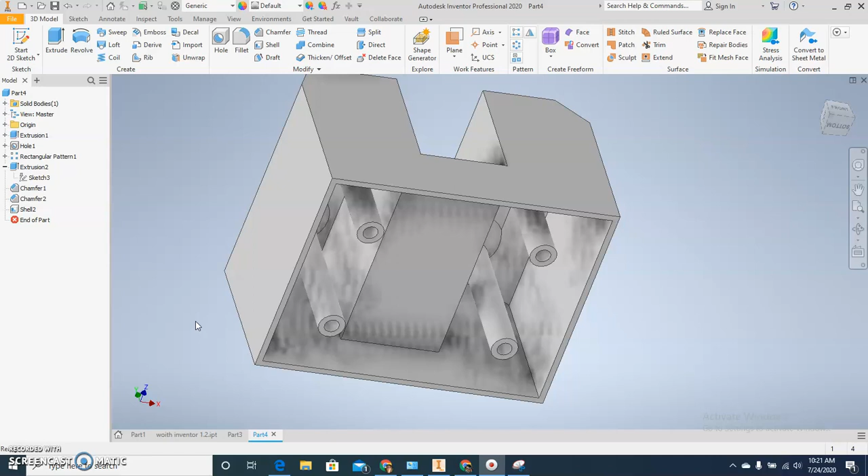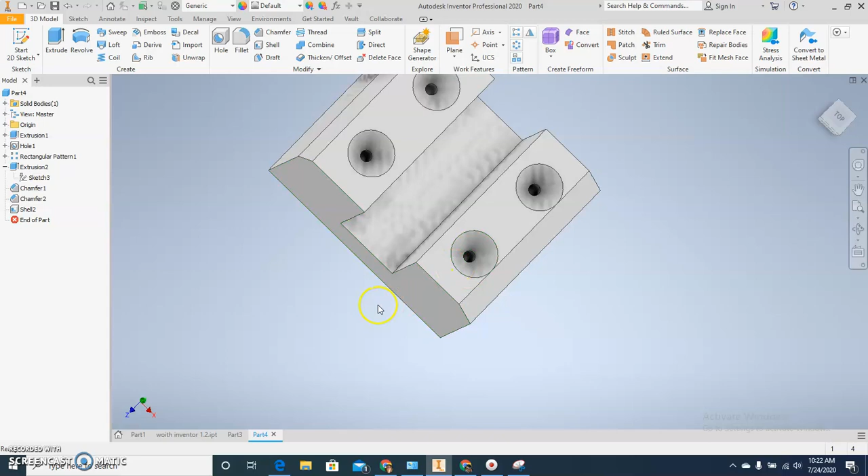I've actually done this video twice now because I had to rush through it. I changed some stuff I was doing, but I think it'll be good for everybody, including me. So we're going to make this: we're going to do a shell, learn a chamfer, learn countersinks, learn how to cut through the object, and get rid of some stuff. We're going to go through this, and I'll show you guys a worksheet. This one might be a little bit longer than the other ones, but it's good medicine anyway.

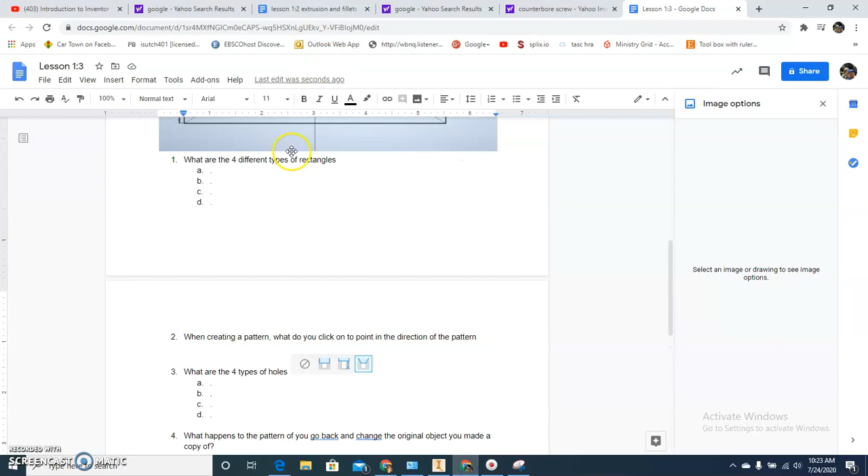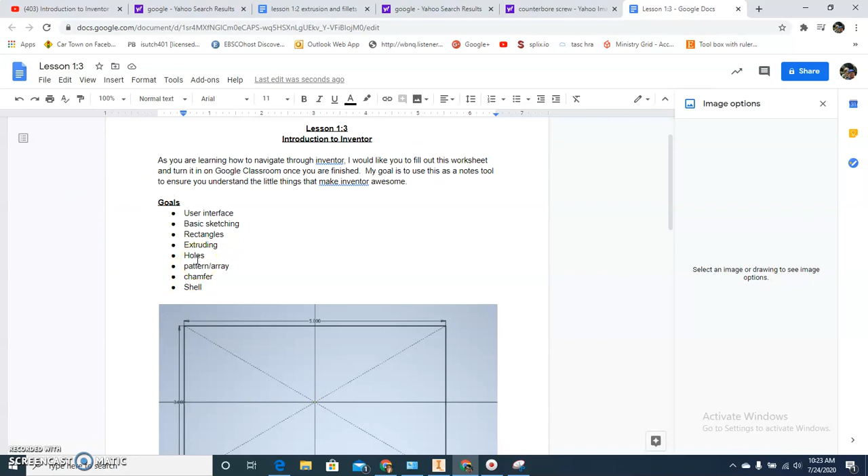Once again, make sure that you are following along on the worksheet, just so we all know that we're on the same page. We're going to go over rectangles, extruding, holes, pattern array, chamfer, shell. This seems like a lot, but when you get down to the brass tacks of it all, this is going to be your basic stuff you do on a daily basis. So get used to it, folks.

Here we go. All right, so I'm going to start off like normal. Now, I want to show you guys a few things before we get started. One, you're making parts. This is not AutoCAD, this is Inventor. You'll forget almost everything you learned on AutoCAD because it's just going to confuse you. You have to do separate files for each thing, as you see with the different things I'm making.

I'm doing the video twice, so I'm going to have 3 of these up here after this because I'm showing you guys how to do stuff. Each individual file will make an individual part because the goal is to assemble these things on one bigger one. This is not a part of something bigger, these are just things we're making.

Next thing, on the interface, if you ever accidentally do this, it's because you've clicked this button up here or somehow you've minimized it. Click this little arrow. Everyone do this real quick just so you know how to do this. It cycles through a whole bunch of stuff. Maybe you do this, maybe you do this, it's no worry. Click this little arrow thing and everything will come back eventually.

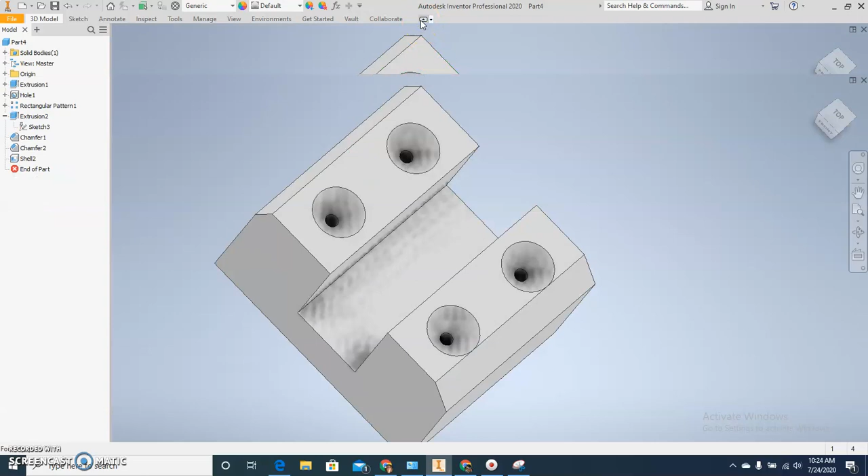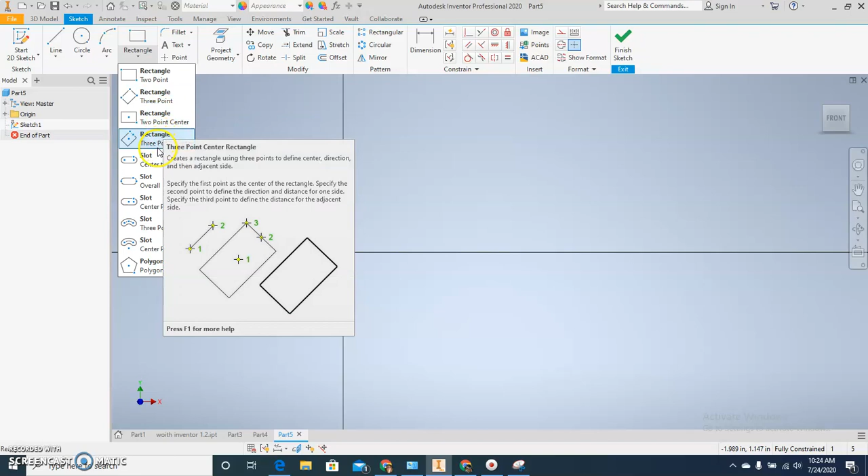All right, here we go. File, new, English standard in.ipt. I'm going to start going through these a little bit faster because you should know how to do this. Start 2D sketch, the XY plane. You're rolling now. Okay, we're going to start with rectangles first. There's 4 different types: 2-point, you've done that, we're going to do it again later. A 3-point, where you click 3 random different points. A 2-point center and a 3-point center. Okay, we're going to do 2-point center on this one.

Click the middle. The function of this is to keep things lined up, because I always want to work off that center point. It helps out everybody. So I'm going to press tab again like I did last time. 3, tab, 5, enter. Now if things get too big while you do it, don't worry, just zoom out or keep typing away and you'll be fine. Okay, press finish sketch.

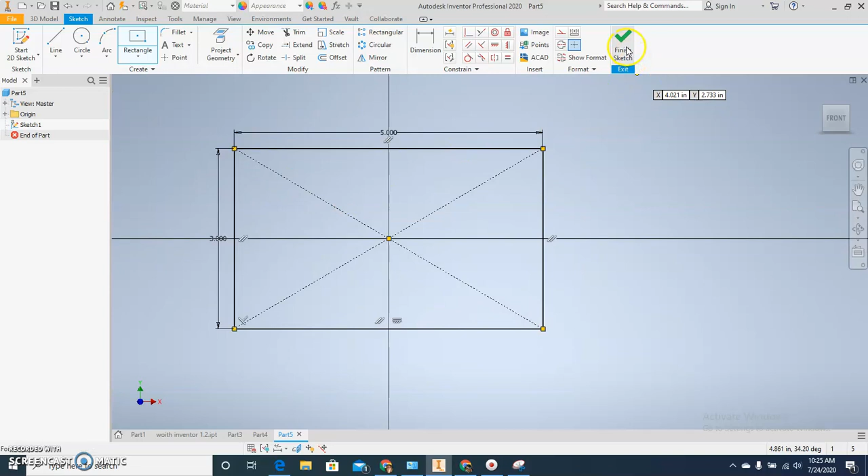Zoom out. Okay, we're going to extrude now. You've done extrusions, awesome, let's just keep it easy. And let's type 4. Okay, easy peasy, you got this.

So next thing is we are going to make a different type of hole. So when you're in hole, so we got to the first one. So there are 4 different types of holes: one is none, which is a straight drill, you all should know how to do that. The other ones are counter bore, spot face, and a counter sink. So here's what those are.

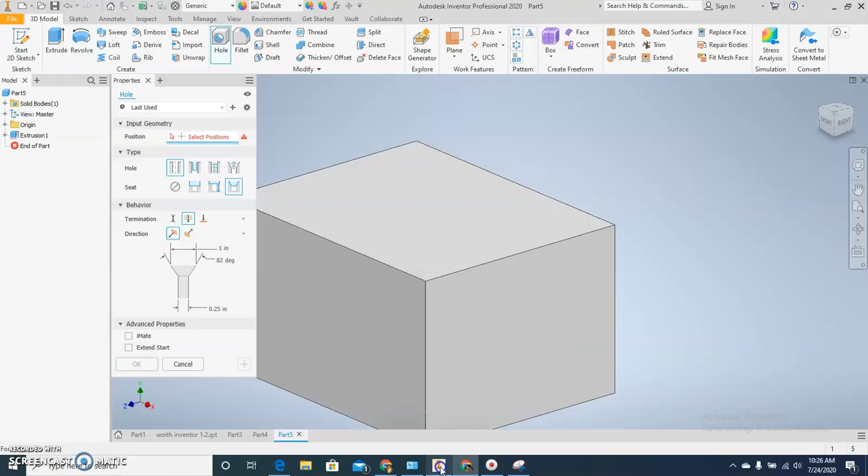So if you're wondering, here's a counter bore screw, used a lot of times in wood and machining, but what it does is it keeps things flat, so it's like a bolt. Okay, the counter sink, which I looked up right before this just so you can see it, is something you would commonly use in wood. It's one that has an angle at the top, just so things sit flush. I just want to show you what those things look like. I rarely do that, but I decided to do it this year. So we're going to do a counter sink. We can do threads too, but I'll wait that for another day.

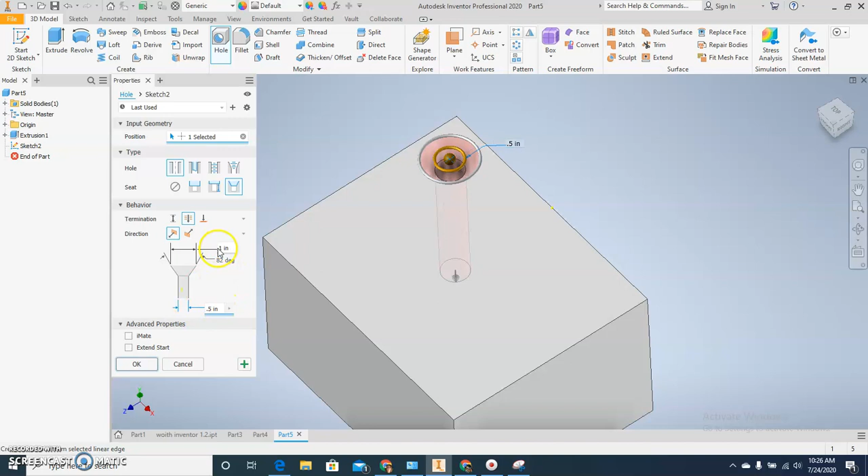All right, so just click up here somewhere. Here's what you know about a countersink: number 1, the top is bigger than the bottom. So if I make this thing right here, let's say this thing is 0.5, and this thing is 0.5, I'm going to get an error. I'm just clicking right now. I'll just press enter real quick and look, it says, dude, I can't do this because these are the same. This is a countersink, not just a basic drill or a none. Okay, so I need to change this.

So I'm going to change this back to 1. Remember, this is diameter going across. All these things, whenever you make a circle or hole in Inventor, it's always based off of a diameter.

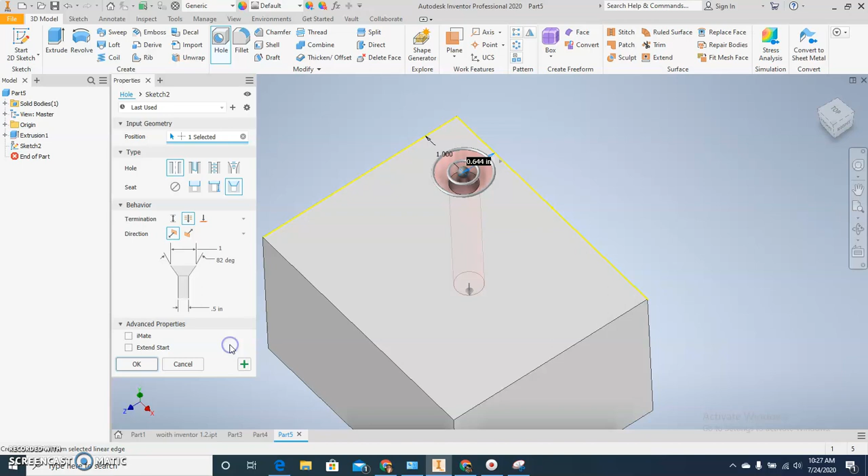So that's made. I'm going to click the edge of this, type 1, press OK. Now I could make multiple different holes here, but then I would have to create the measurements on the edge, and that just takes too much time. So we have a better way of doing it, which is called a pattern, which is next.

There are a few different types of patterns. One is rectangular. We have circle, mirror, sketch-driven. That looks like a fun one. Never really used that one a whole lot. It must be something new or something I've just ignored all my life.

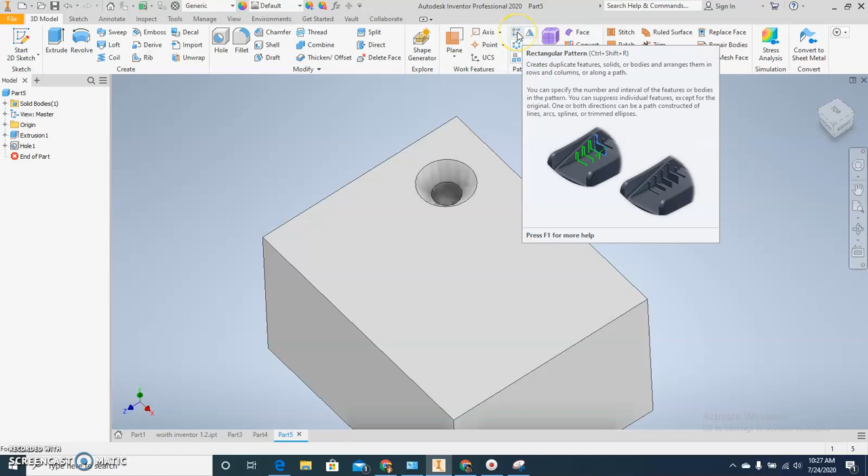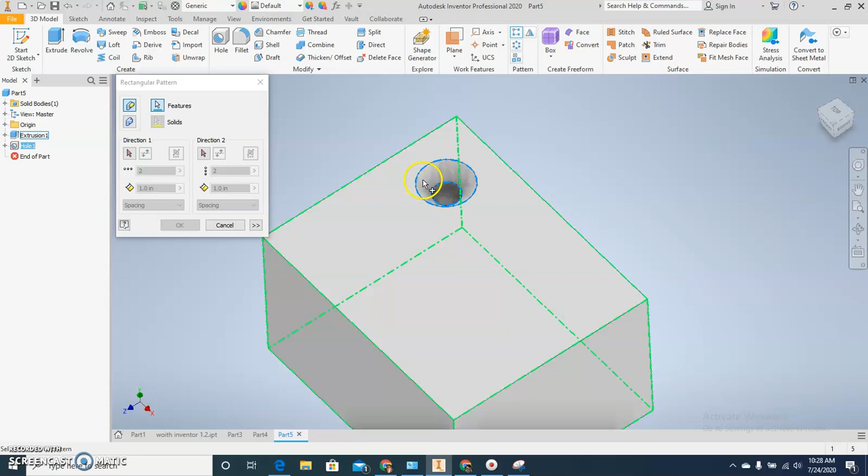Okay, rectangular pattern. First thing you have to do is click your feature. It's already defaulted. If for some reason you can't click it and it's not seeing it, just click this feature button and it will come back. Now, I can click on the word hole, or I can click the hole itself. It doesn't matter. The next thing you have to do is pick a direction.

On the worksheet, I will ask you guys what do you click on. You want to click on an edge so it points in the right way. Mine's going the wrong way, which is great. Do a little flippy here. I always like the flippy flippies. You can click it all you want to.

And this is the number, so if I change this, I will get a series of different ones. I don't want that. I just want 2. I click this, 3. Love that number.

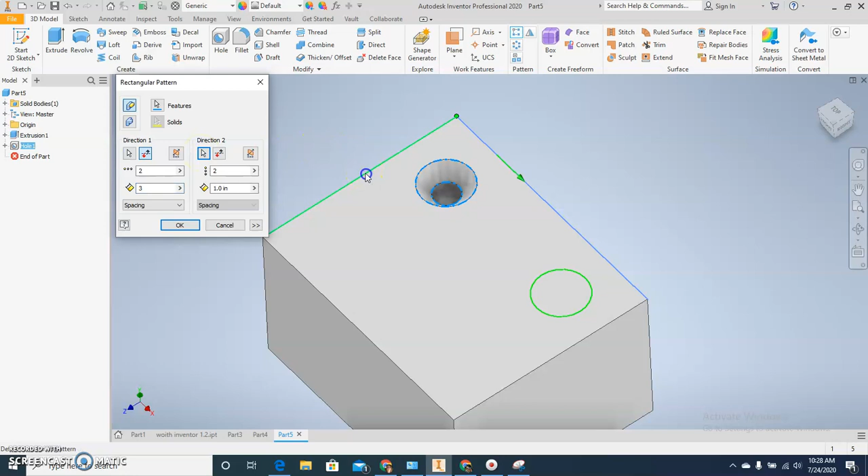Okay, not done yet. I need to go this way because I want to make 4 of these. So I'm going to click direction 2. I'm going to click this edge here. As you see, it's going this way. If yours is going the wrong direction, flippy. Maybe you start on the bottom here and it's going the wrong way.

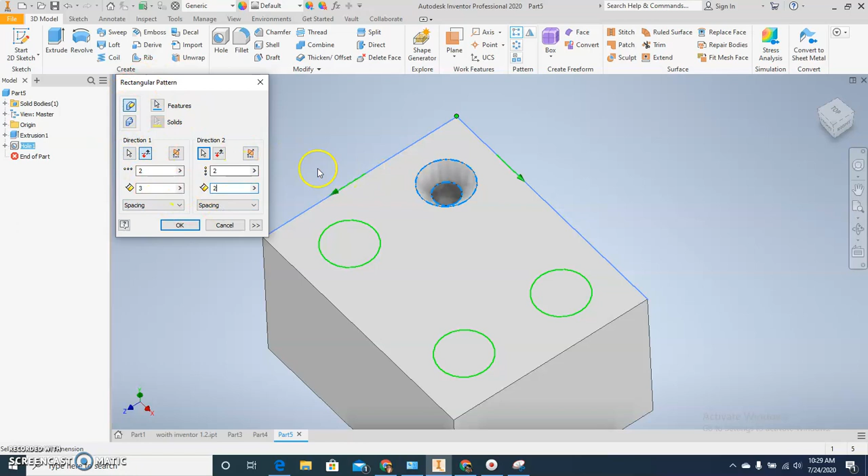I don't know, I'm going to go 3. Oh, nope, 3 too much. So 2. These are the numbers you should stick with. Freeze this for a moment if you need to, just to get your numbers right so you're good. Press OK. You made a pattern.

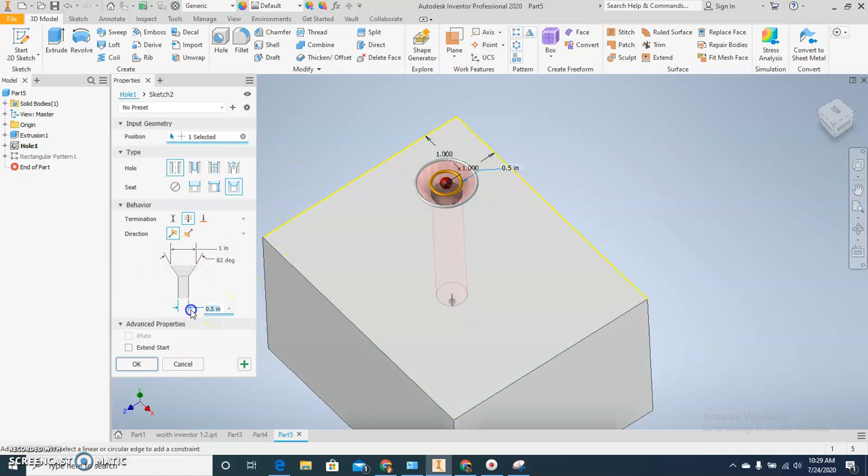I applaud you. Now let's say, oops, I need to change one of these. Oh no, I got to change this. So if you have to change one of these, you can click on the plus, click on hole, and it will bring up all your little stuff here. Let's say I want to change this to 0.25, so please do that. It's smaller. It does that for all of them.

Okay, here's a little fun thing. I didn't plan on doing this, but I decided to. Why? Because I can. I can also hide one. Watch this. If I click it, nope, I'm not going to do that because it's not working. I don't want to seem like a fool. Oh, there it is. I just missed it.

I can't click on the first one because that's my original one. If I click on the bottom one right here, or any of these other ones, I get suppress, and it goes away. But I don't want to do that right now. I want to make that go back. You don't have to do that. I'm just showing you.

That didn't go as smooth as I thought it was in my mind, but you get the point, because you can't suppress the first one. But I can suppress the other ones. This time I would like to leave them on.

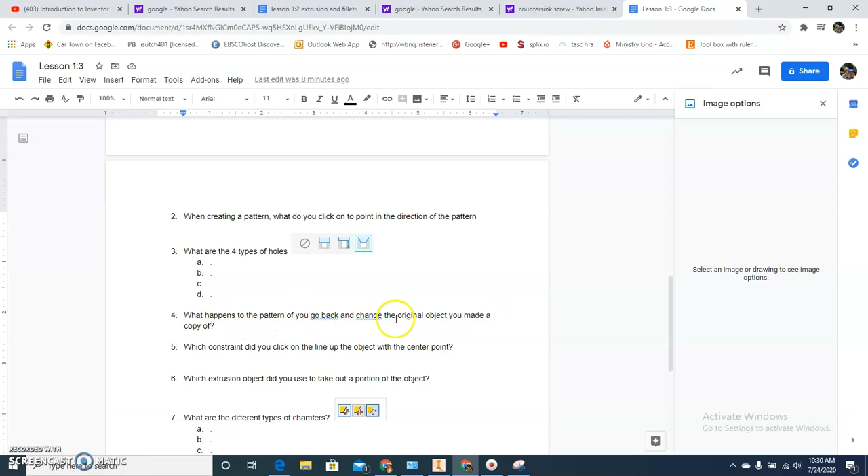Okay, next step. I should be rolling along in the worksheet if you're still looking at that. So holes are done, the patterns. What happens to the pattern if you go back and change it? All of them change.

Next, we're going to do your first constraint. Congratulations. So I need to make a sketch on a surface. Here's how you do that. If I click on a surface, I will get a series of different options. I think I showed you guys this once already. Yeah, I did it in the first video. So we're going to do a create sketch again.

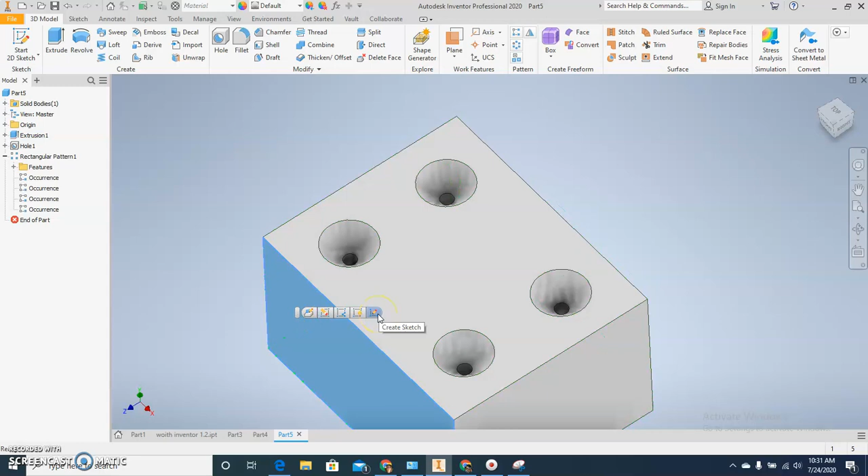So I need to go rectangle, but I'm going to go 2 point. Make sure you go 2 point. You want to click along the top here. Doesn't really matter where because I'm not going to care. Just click like this.

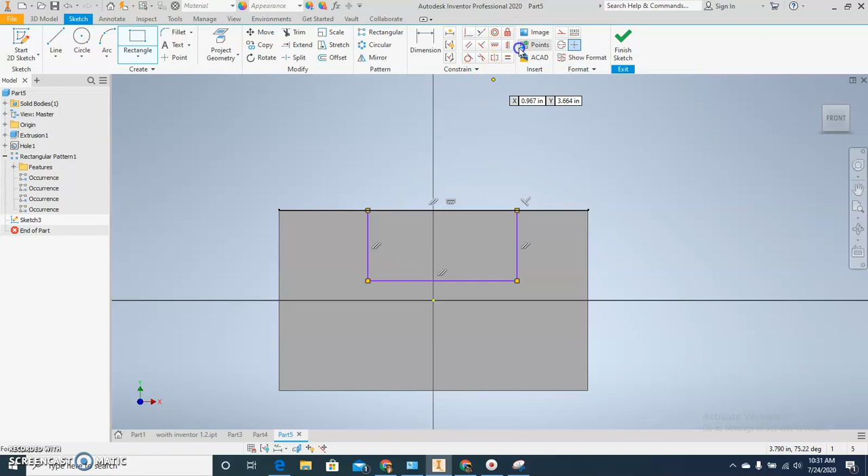Now I want to do what's called a vertical constraint. I want to vertically line up the middle of this line to this dot right here, which is your origin point. So I'm going to move my mouse over, find the dot, click on this dot, it lines it up. Pretty easy. Click your dimension because I want to change this. Let's make this 2.

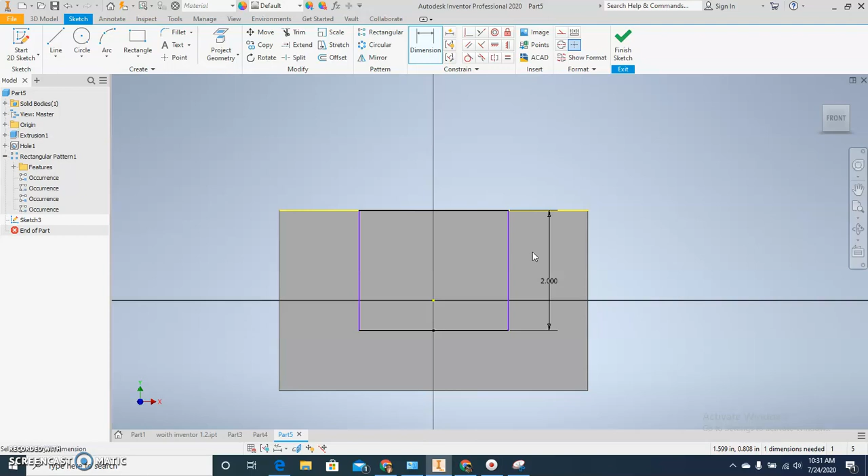Okay, and let's make this 1.5. There we go. Press finish sketch. You're doing good. Yay. Hopefully.

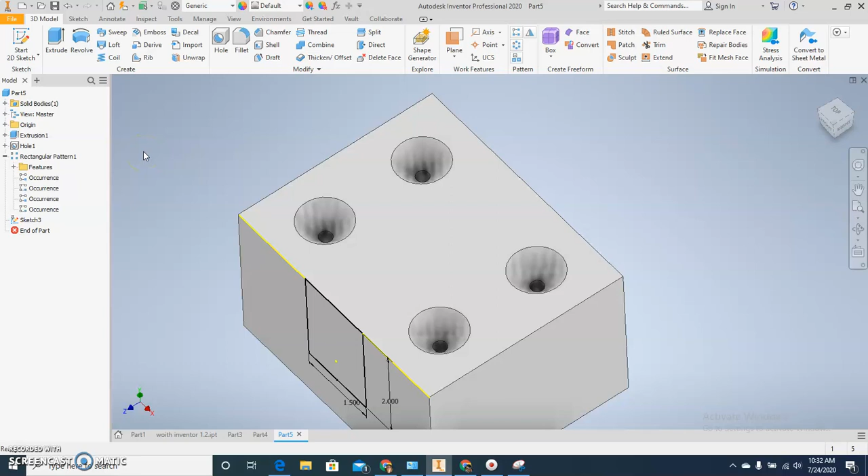Who knows? All right, click extrude. Okay, whenever you click an extrusion, it looks for fresh geometry, so fresh meat, and it will always default to bumping it out like this. Here's your options. You can just click cut. It'll just cut all the way through.

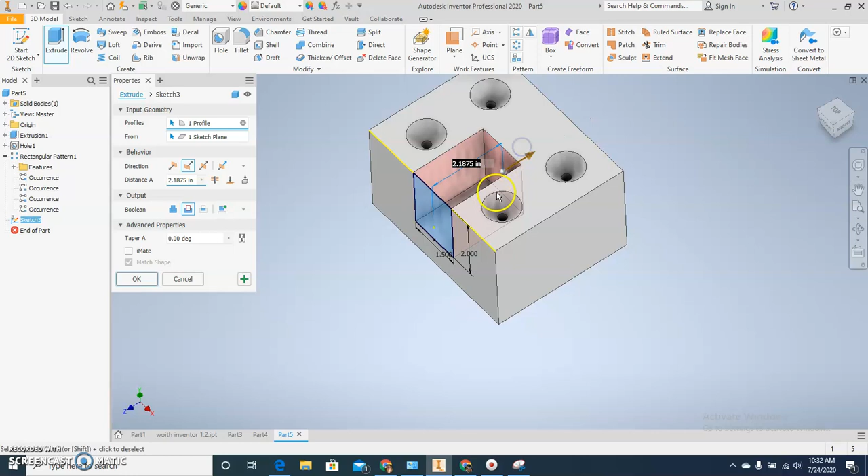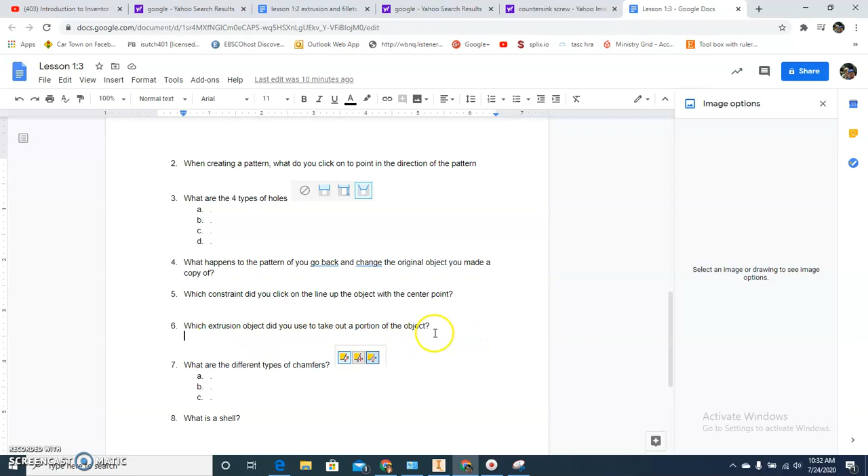You can drag the mouse. You can type in a measurement. Maybe I only want it halfway. I want it all the way through. So once you get that, press OK. So now you did your cut. Okay? So looking back at your sheet, this should be vertical constraint. Which extrusion did you use to take out a portion? You use cut. 2 more things to go, and this video is done.

Man, I'm knocking out videos today. Like teacher of the moment here. All right. So next thing, I hope I'm not going too fast. Please pause. I got 15 minutes on these videos, and I don't want to make these things really, really super long. I think you guys appreciate that.

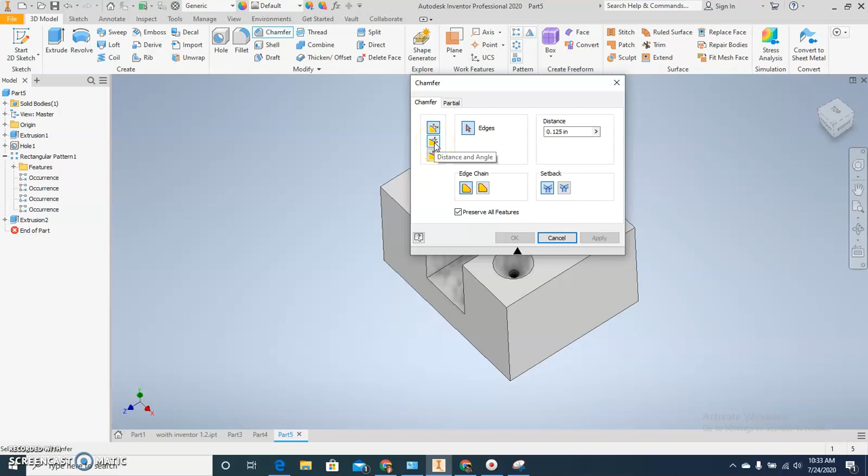Okay, chamfer. I want to slow down now. 3 different types of chamfers. Distance, distance and angle, and two distances. We're going to do the top 2. Okay. So the great thing about this program is that it always does a preview on the features. So I'm just going to click this edge right here. It's doing 0.125 both ways. So it's going this way and this way, not at an angle. It's going from the edge to the surface and the top edge to this surface right here.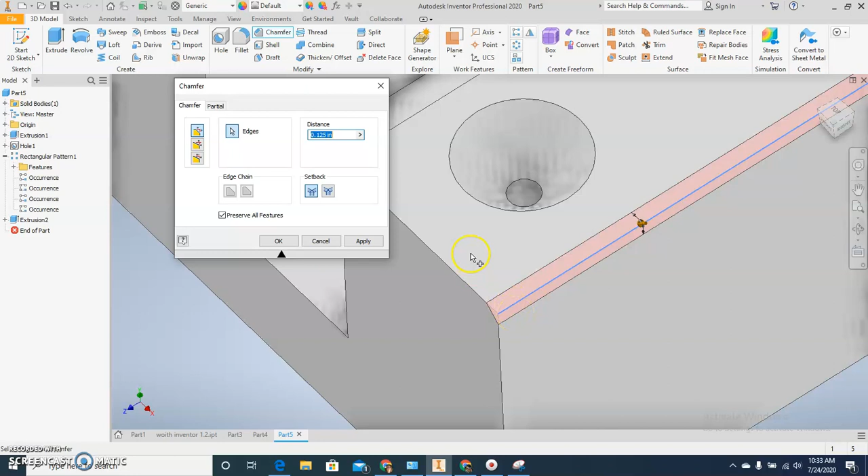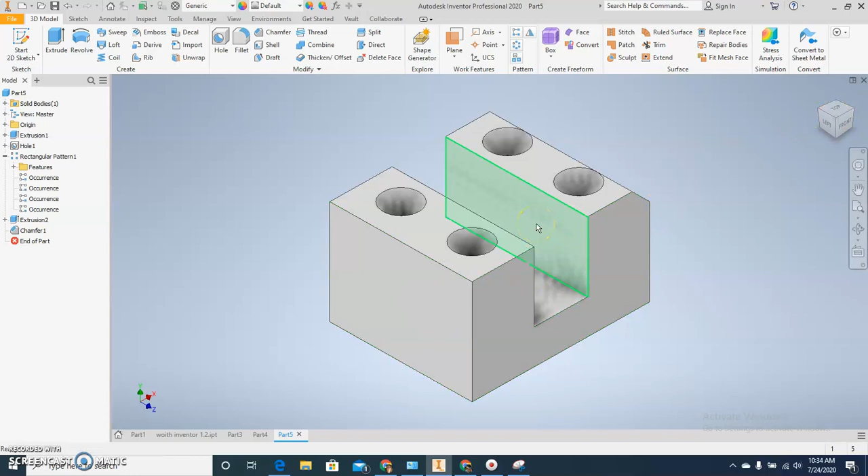But I want to change it to, let's go 0.5 so we can really see it. And then we know what's going on. I know it's near the edge of the countersink, but I couldn't care less. Press OK. Shift scroll if you don't know how to do that. Or you can grab the cube and you can just move it like this. I like clicking the corners because it puts it in a nice isometric view. For those of you guys who have done any hand drawings, you know what isometric is. So here we go. We are going to do another chamfer.

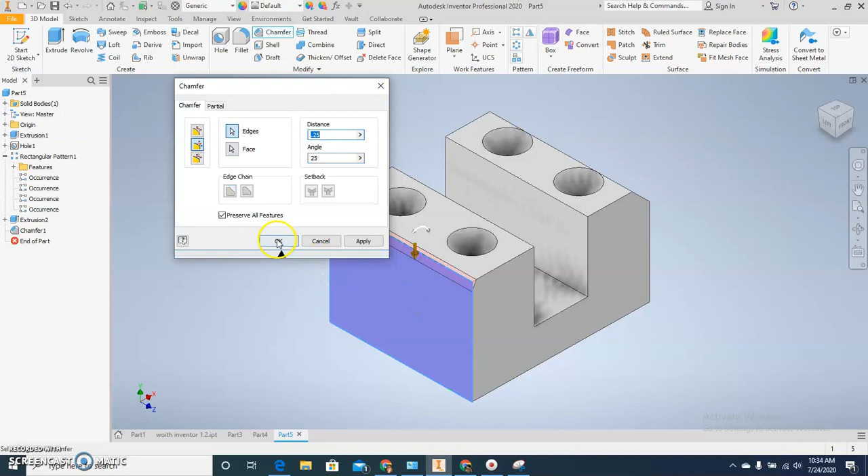Okay. Unlike in the fillets, this one kind of just wants to do one at a time, which is fine. So I'm going to click on distance and angle. So I'm going to go 0.25 up here. And let's do 25 here. We'll just keep it nice and simple for you guys. So the first thing I want you to do is click on the surface that will go 0.25 down, which is this one here. Then you click the edge, and you see you have an angle that looks like this.

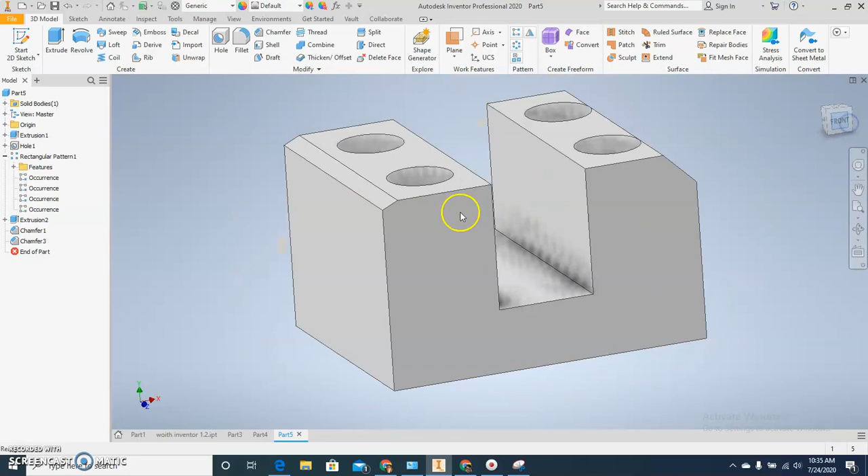Now, just for the sake of argument, and I have time, I'm going to erase this. You don't have to. I'm just showing you guys this. If I do chamfer again, I do the same measurements, and I click up here first, and then this. You see how it does it a little differently that time. So this is the second time. Let me undo. This is the first time. See the difference? Cool, huh? Now you know. All right, last thing is shell.

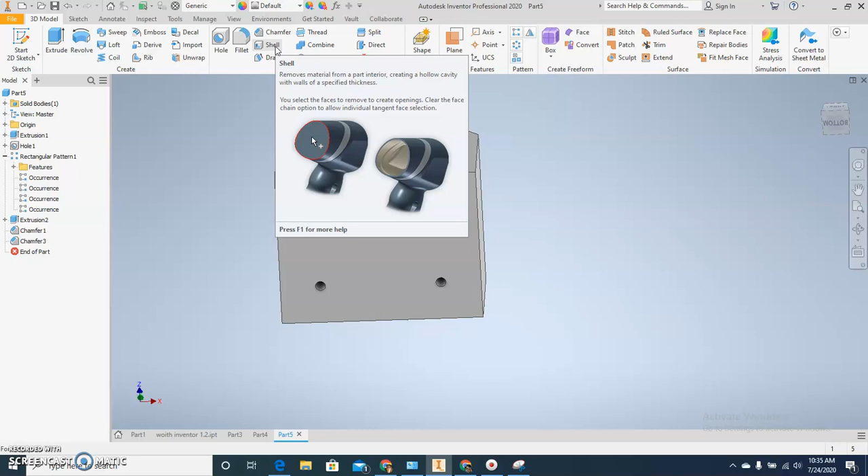If you ever want to know what something is on here, all you have to do is just hover over it. Just leave your mouse there for a minute, and you see what it is. So I want you to write down: removes material from a part interior, creating a hollow cavity with walls of a specified thickness. Write that down. Okay? Shells are very, very simple.

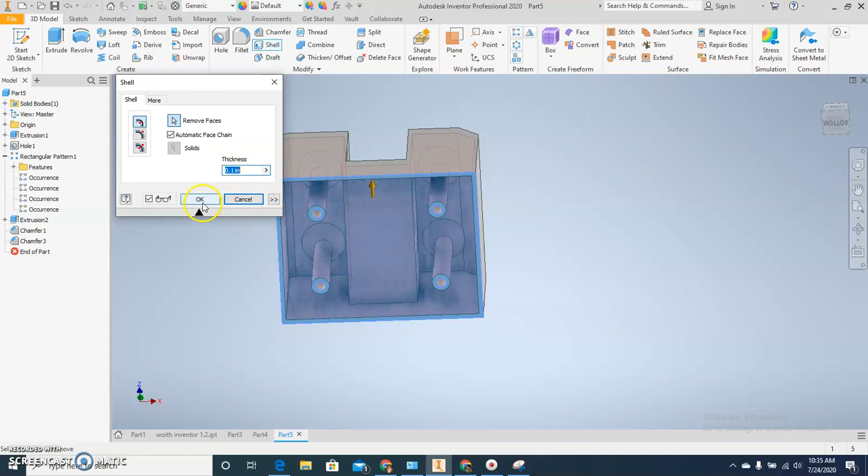You click. Now the whole thing lights up like this because it's like, okay, dude, all you have to do is tell me what surface you want to shell. Well, I want to shell the bottom here. I like the default number. Press OK. That's it. Now, if for some reason you press shell and you press OK, you're like, oh, oops, sorry, I gotta do it again. It doesn't like it when you shell twice. So you would have to erase this if you do it this way.

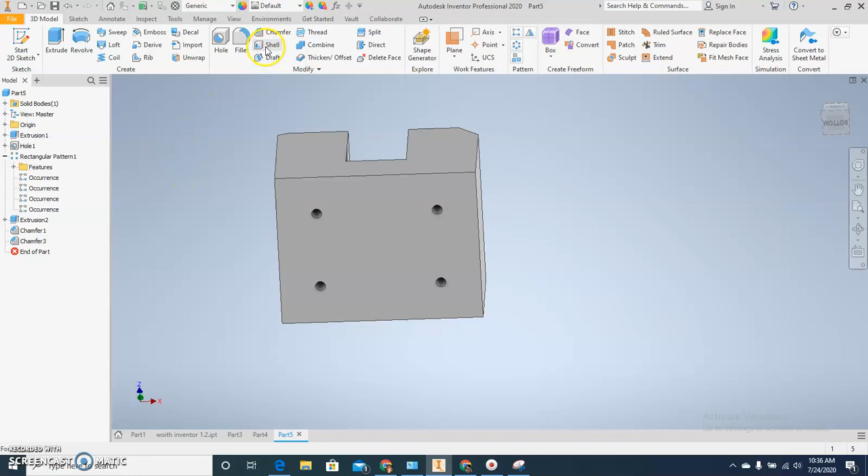I see this happen all the time the first time someone tries to shell. You always have to click on a surface. Click on a surface. There we go. You are done. Good job. All right, you got your worksheet finished. You got your part finished.

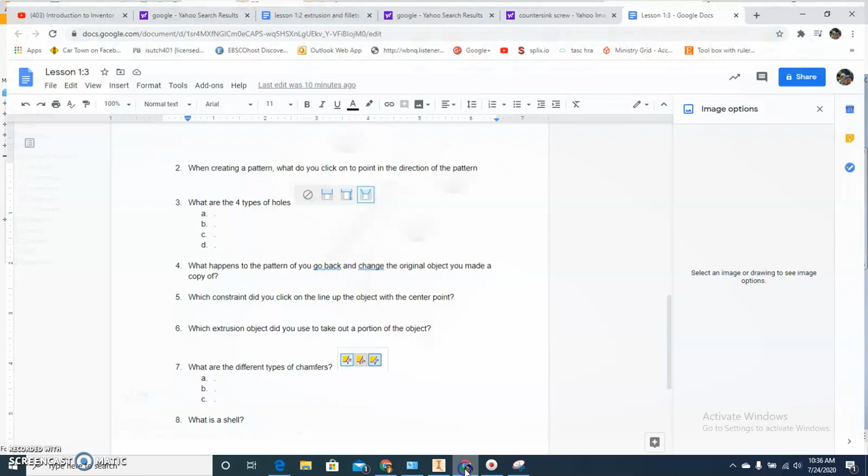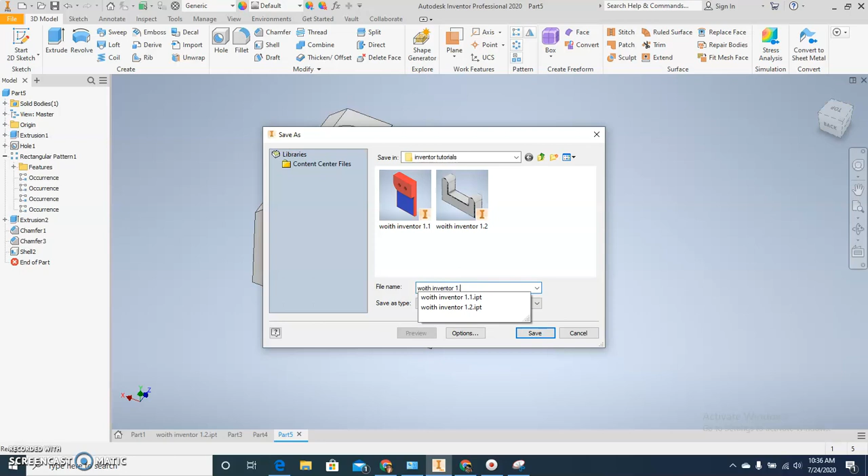You're doing fantastic on these videos, I hope. These are easy. Do me a favor. Save it. Save as. We're going to go woith, because that's me. No need for caps. Woith Inventor 1.3. Save it. You're going to upload it to me, and we're good.